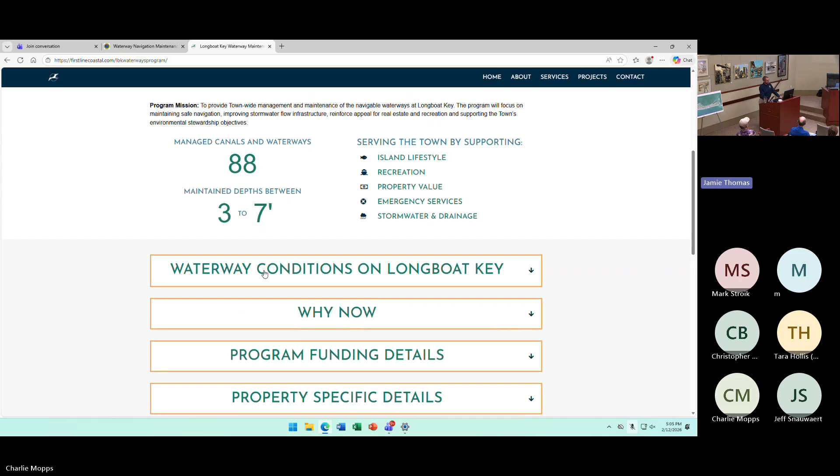And in it holds a lot of information. I'll scroll to the side because I made the mistake of not doing that last time. But if you go into this, you'll have a lot of drop-down menus with some really interesting information.

This one here, the waterway conditions on Longboat Key - essentially they went out and did a survey of every canal, drove it with a boat, a 21-foot boat, an Aquasport. They actually had a 360 camera on top that mimics exactly like if you took the little guy and put him on a Google map and you can go up and down a street. They literally did this with a boat, so you can see where the shoalings are and everything else.

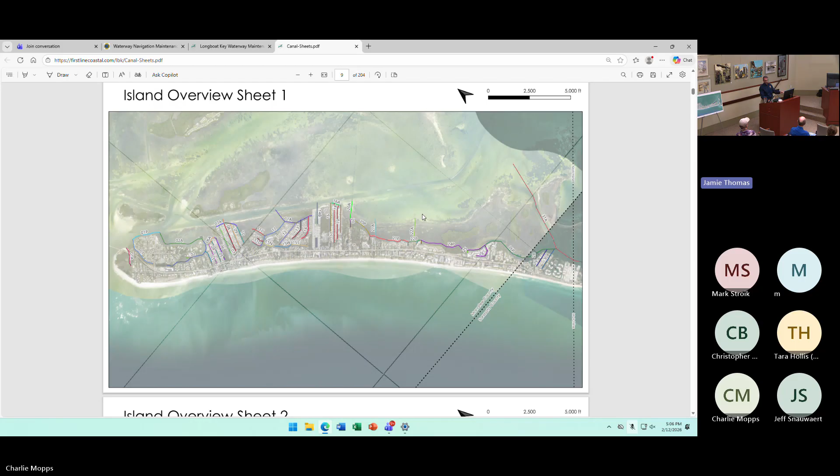But if you click on this part right here, it's going to come up with the canal sheets. I like to keep this sheet open because a lot of times the questions lead to, whoa, what about this, what about that? It's broken down between all of these, and all of your canals are numbered. So all you have to do is find the number of your canal, go to your canal sheet, and it will show your existing condition and what the end game is that we're trying to achieve on your behalf.

And it has a bunch of other information. They actually did a boat survey while they're in there. They looked at the average size of a vessel, the average width of a vessel, because he's been a captain for as long or longer than I have. He can look at a vessel, look up the manufacturer information, and find out the draft of that vessel. So all that information is in this, so you can see if the canal is meeting the needs and service levels of the people currently utilizing them.

The canal sheets, this is just one of them. This is Canal 1, obviously. It shows all the existing conditions, the design parameters. It's permitted as a 20-foot wide canal. And then it tells what permit might already be associated with it. So there's been a lot of effort and research that went behind this.

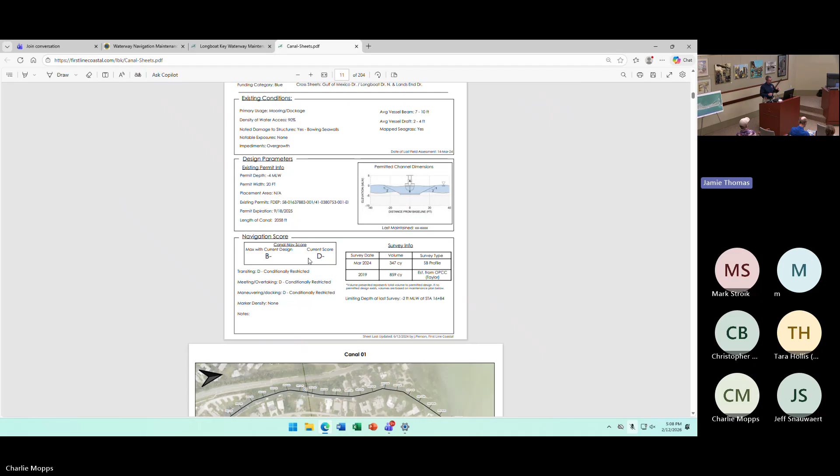The current condition is a D minus, so it's navigable, but almost barely. Once the program is up and operational, we're hoping to get it up to at least a B minus. These parameters are actually explained a little more in there, with a depiction and the goals of the program for that specific canal.

If we scroll down, why now? It has some of the messaging that we're going to talk through tonight. The program funding details tell us we're looking to collect up, in and around $9 million within that first 5 years. It's always been designed as a pay-as-you-go program, so we'd have to collect money in order to have enough in the pocket to go forward with a project.

After that first 5 years, we're looking to reduce that initial assessment in half, so in year 6, at least in half. That's when we start getting into the maintenance part of the program, because right now we're in restoration. The last time any of the canals in the town were dredged was in 2003, so 23 years ago was the last time there was any effort to make these canals navigable.

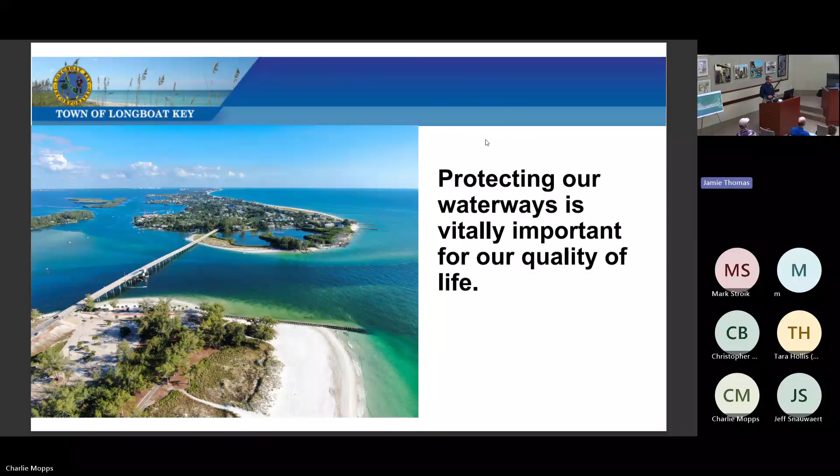As we move through, this program actually supports both, and it aligns with the vision and mission of the town, where the natural assets of a barrier island combine with cultural and recreational amenities. Well, canals are recreational amenities, to vigorously maintain and preserve Longboat Key's status as a premier residential and visitor spot.

Those things are one of the reasons why people buy property on Longboat Key — to go to the beach, to have a waterfront property where they can have a boat in their backyard. It's one of those things that are a driving force behind the potential development of this program.

Our property values and quality of life revolve around clean, navigable water. You have the unique opportunity to live in one of the only 14 or so national marine estuaries. Sarasota Bay is a national marine estuary. It was designated that a long time ago.

The health of that bay is doing really well right now. We actually work a lot with the Sarasota Bay Estuary Program and do grant funding opportunities with them. But this program, in some ways, as I'll demonstrate, will actually support what they're looking for. And waterways are a shared amenity that support each of us — I'll get into some of the sharing those waterways do, even if you're not on a waterway.

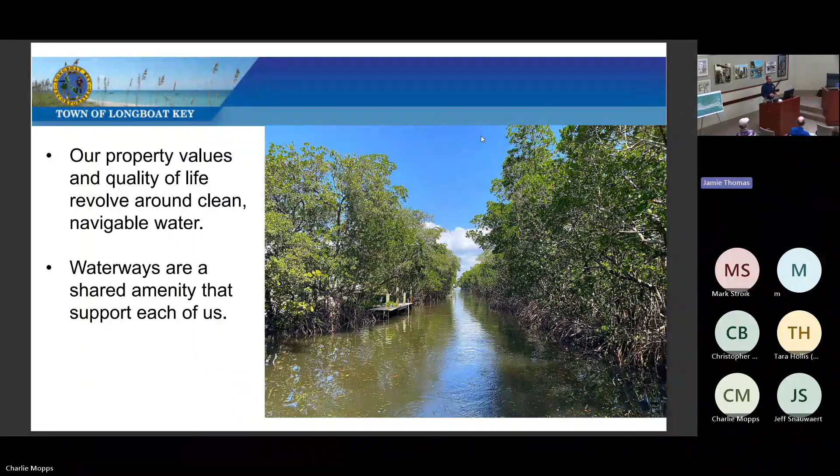The issue was first brought to the commission back in 1996. In 1996, they did a bunch of studies, hired other people and consultants at the time. They did legal reviews and everything else to try to establish a canal maintenance program, like a navigation maintenance program. Back then—

You fast forward to 2007, and then there was a recession. And at that recession, the thing fell off.

When I got hired — because for 15 years I was Charlotte County's coastal programs manager, and that included over 300 miles of navigable channel that I had to keep navigable. Most of those were residential canals like we have, or access channels just like we have, including beaches. So when they learned I had this kind of expertise, it kind of revigorated the whole concept — how did you do it down there, what's going on.

So I started doing a bunch of research, and through 12 to 15 presentations to the commission since I've been here, we've gotten to this point. We've hired great consultants that got us to the point where we're able to potentially push a program forward. And as you can see, over 30 reviews and public hearings were conducted on behalf of this potential program.

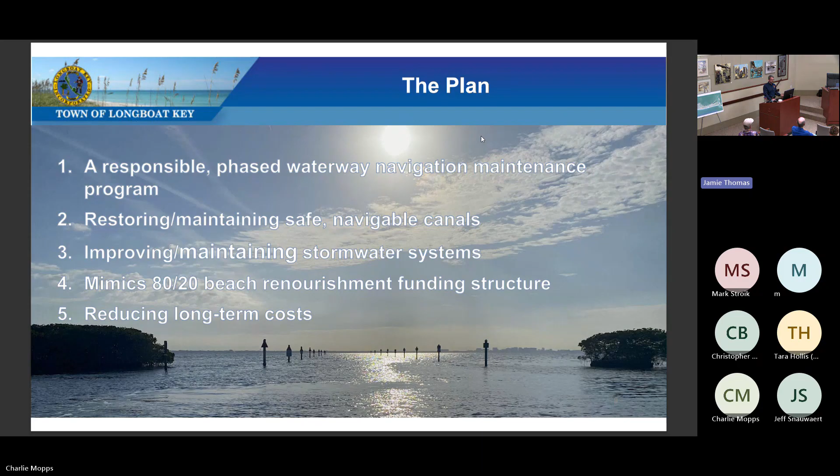By having a plan in place and a program in place, it's going to reduce long-term costs. So what are some of the benefits? For recreational boaters, it's maintaining the waterways so they can get in and out of those canals, and people can visit those nice fishing spots around Bayou Hammock and whatnot. It makes it so you can actually get to these locations.

It improves and maintains our water flow and stormwater. It reinforces appeal for real estate and tourism. If you live on a canal and you're going to sell your house, being able to say you live on a municipal maintained waterway might drive up the value of your property a little bit. There's also potential reuse of qualified dredge material.

In your canals, you have material that needs to come out, but we also have a 3 to 4 acre mitigation site, a seagrass mitigation site. I need about 24,000 cubic yards to fill in order to create that mitigation site, and that's tied to this program. It comes at a hefty cost, but if I can use some of the material from your canals to fill that, it's a win-win situation.

Environmental enhancements: some of our neighboring communities on the East Coast actually dredge for bioload reduction, where they have blue-green algae blooms. They dredge to get the detritus, the decaying material, off the bottom of the canal, which is a bioload. Bioloads like this contribute to red tide, feeding those nasty organisms. So if you dredge it, get rid of it, and put it in a deep pocket or get it gone, that material won't be there to feed those nasty things.

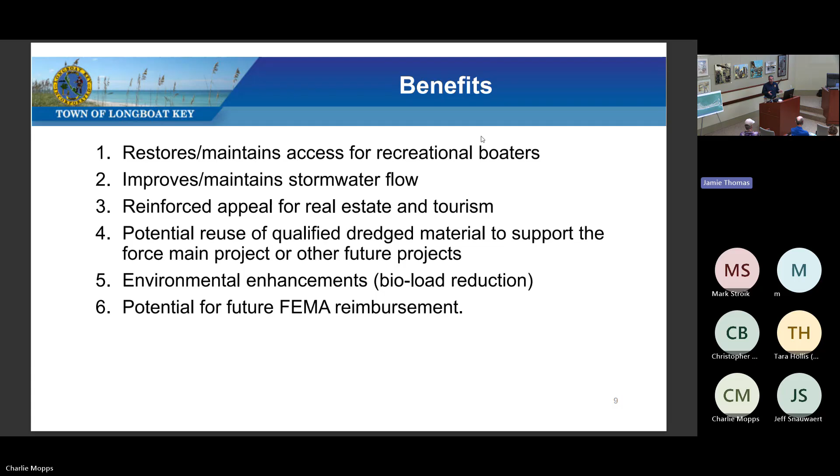I was able to go to FEMA and say, can you pay for this? And they said, here you go. So I was able to do it at no cost to the citizens there, because we were able to prove that they were in a maintained navigation waterway program.

How do we pay for it? Fair, simple, transparent - those are the things these folks have to look at, because it has to be defendable. They use those principles to make sure that for you all, we're doing things in a fair, simple, and transparent method. 80% of the cost would be paid by the direct access boaters.

So if you live on a canal and you have a boat, or have the potential to put a boat there, you would bear 80% of the cost. If you do not, you would pay 20% of that cost. We're estimating around $9 million is what we need to collect within the first 5 years, so about $2 million a year, to get us to the point where we need to be in order to get all of our canals restored.

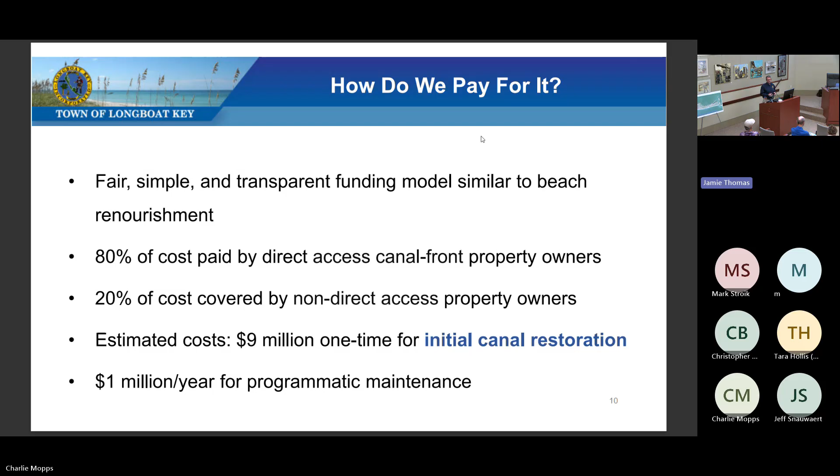Right now we're in the process of restoring canals, we're not maintaining them. You can't go through 23 years of neglect and think you're just maintaining. After that, we're looking at initially year 6, year 7, a $1 million cost. Then we'll be assessing what the shoaling rates are, where we need to hit, and can we actually drive those costs even further down. By doing so, we're looking to halve at least the initial assessments.

So the methodology was, 30% of the entire program would be paid for by ad valorem millage, so everybody pays into that. And the breakdown goes: if you're direct access, you pay 10% millage and 70% assessment, totaling 80%; if not, you pay 20% millage, which is the assessment portion of it.

So your total would be 80%. If you're non-direct access, then you would only be paying 20% of the total cost of the program.

What we did was break down the island a little bit here, and there's maps up here, and there's more maps we can show you. When we get to the online portion, when I'm walking you through how to look this stuff up, it's delineated just like this, just different colors.

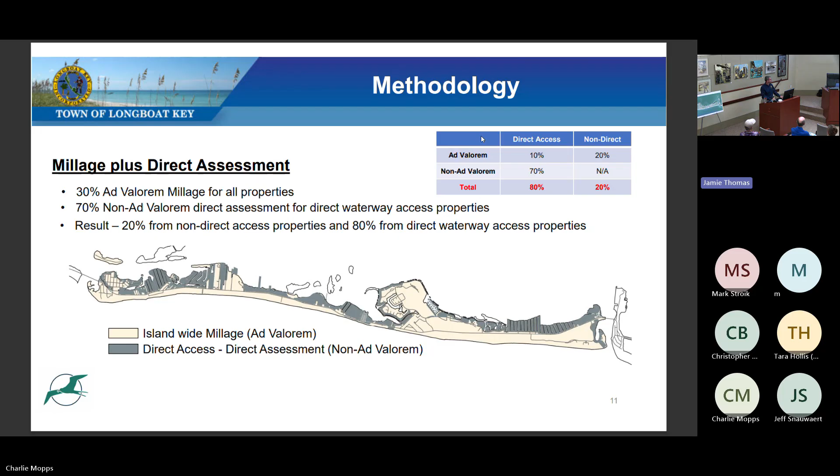So why does it work? It's fair, familiar, consistent with past practices. The past practice was 80-20 at the beach. If you lived west of Gulf of Mexico Drive, you paid the 80%. If you lived east of Gulf of Mexico Drive, you didn't.

You paid the 20. It saves money in the long run by avoiding these types of emergency actions. When you're out there just doing maintenance, it's kind of like patching a pothole versus repaving an entire road. It's the escalation that we're trying to avoid in the future, and it enhances the overall community value and island resiliency. The more we can keep nice water for our drain pipes to receive, the better resiliency we're providing.

And then maintenance minimizes long-term action. One of the examples I like to give is we did this project on the Myakka River side. It was a pretty big community, but we were there for over a year because they let their canals get to such a point of disrepair that it took us a year to get them back to steady state operations.

That means a contractor was there all the time, up and down the roads, with equipment just outside the house. The next time they came back, because now they were part of a maintenance program, all we had to do was hit the access channels and the dead end parts of the canal. I had a contract out there for a couple of months, so there's less impact to the community when you have a program.

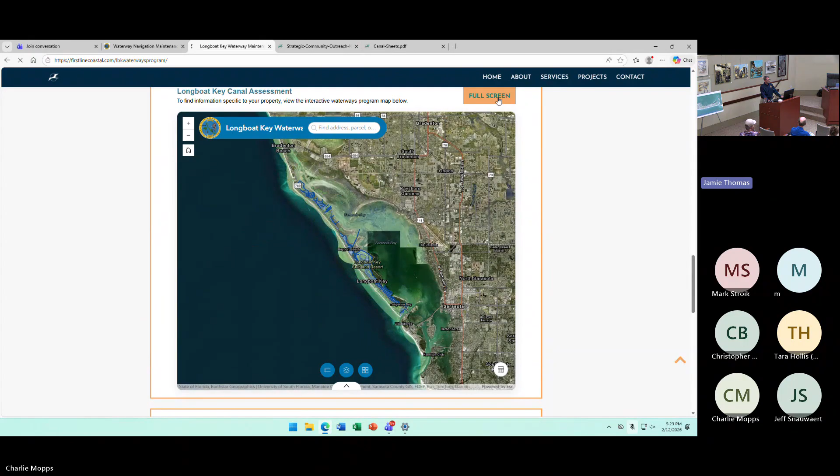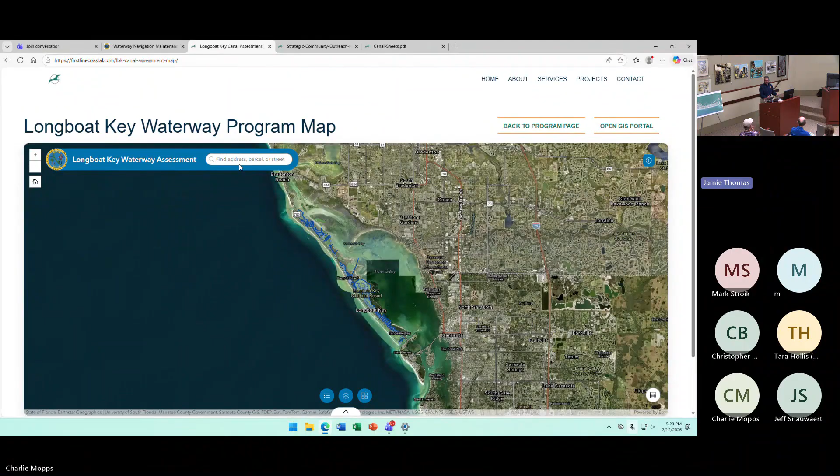Now remember, there's two ways of getting there. You can get right to this same thing from the town's website, or you can go to this website, look through some material, and get into the same thing. If you have a property address, you can just put it in here and go right to what you need.

Or if you're like, oh, I just want to, I'm curious, I want to see what my neighbor's paying, I'm just going to pick a random house. I don't know who lives there, I'm just pulling it up. This person has a taxable value of over $2 million.

They have one EBU. If you have a dock or if you have two docks, it's all one. Or if you don't have a dock, but you have the ability to put in a dock, it's still one.

When you look at this, the mill rate's very low, it's 0.0623. So their ad valorem assessment on a $2.6 million property is $162. If their assessment, that's the millage tax, is $162, and their assessment, that's a fixed fee no matter who we're talking about, is $620, so their yearly assessment is $782 to be in the program.

And we broke it down. We actually looked at every condo, we looked at every property, even ones that have a shared dock structure. You've got Longboat Harbor up in here.

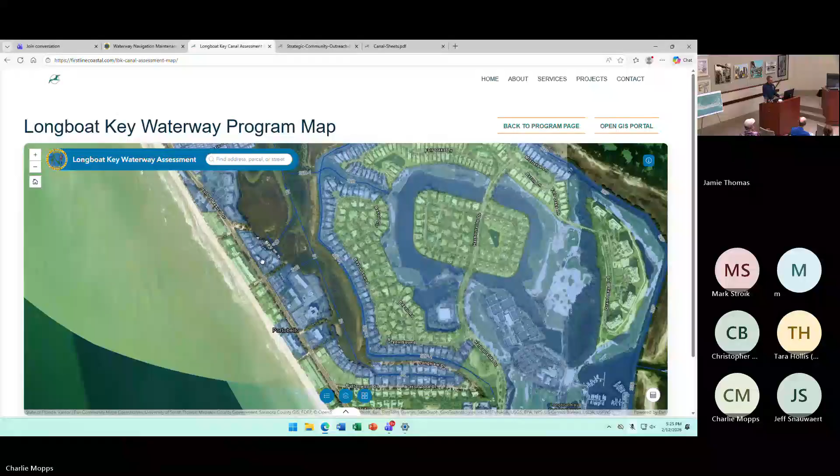Actually, it's a little bit further, sorry about that. Yeah, that's Spanish Main. Yep, they do too, yeah, it's a good one. So we can go to Twin Shores.

So if you click on this, you'll see that even in the shared use areas where you have a common element with a docking structure, they actually break it down. This isn't coming up right... is that the common area, or do I have to get into one of these? I think if you're in a common area, it shows 0. Yeah, there you go, because here it is.

It's a common area because common areas are not taxable, right? But you have to tie it to a property. So the way it's broken down is they have an ad valorem assessment of 1.25, and then the EBU rate of 620. Assessed value is $20,000. So their combined total annual is $125.25.

That's for the first 5 years. At year 6, it drops down to $64. And then we're hoping to reduce even that cost further because as we go through and we're able to find out where shoaling rates are and whatnot, we can actually see what's the frequency of action that we need to take. But you have to remember, even in the off years, we're going out monitoring.

We're doing those surveys. So we can go to FEMA. We can see what those shoaling rates are. We can actually develop that level of knowledge that we can actually incorporate into the program and then hopefully even reduce these costs further.

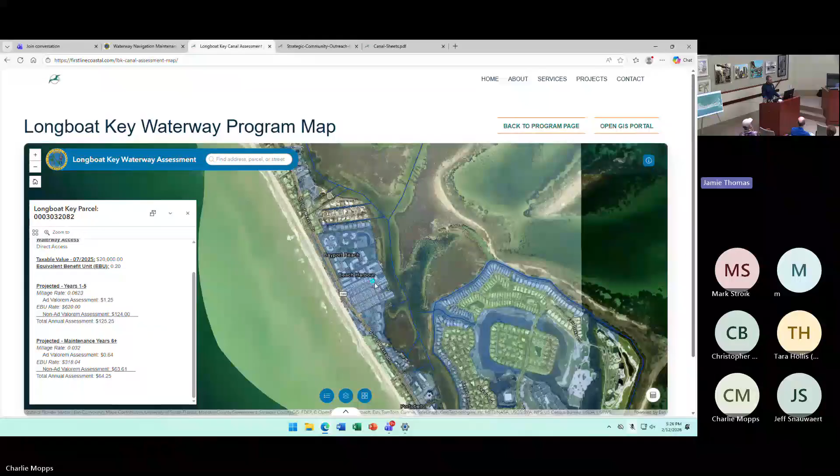But this is like a really easy, user-friendly way of being able to go into any one of these. If you own a slip out here, the property value is only $100,000. Ad valorem rate is only $6.53 plus the assessment, that fixed fee assessment. So you're looking at 626. You can do that for any property on the entire island.

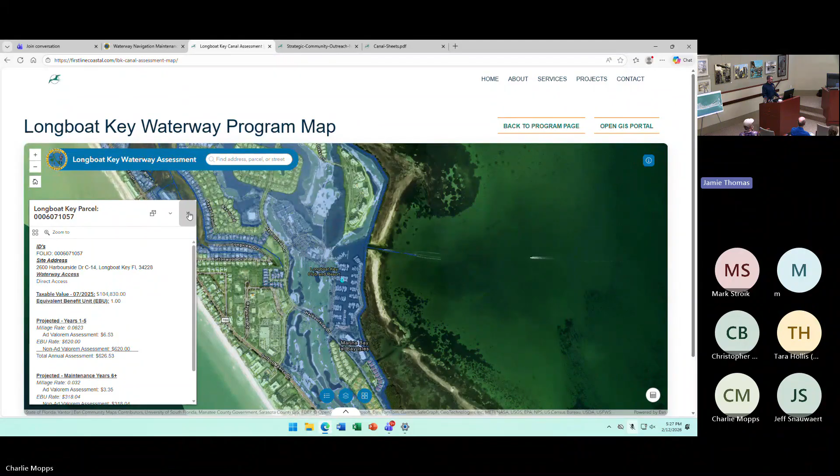So with that, a couple of other things we're looking to do, and I want to bring this up, and then I'm gonna leave the floor to everybody. That way we can start fielding some questions. We've asked for money to kind of make this program happen sooner, because one of the questions we always ask is, when can you start dredging?

Well, if it's a pay-as-you-go program, we're looking at about year 3 before we can start actually getting a dredge out there. However, we did reach out because the Water Resource Development Act of 2026 had opened up for mitigation, bayside type mitigation, dredging, relating to dredge activity, that type of stuff. So we actually put in an appropriations request through Congressman Buchanan, or whoever wants to jump on the bandwagon and support this, for $3 million, because that's about the figure it's going to cost to build the 3-acre mitigation site right here.

And what we used for that as justification was, this is the old Intracoastal Waterway. It's called the Long Bar Channel. It was dredged by the Army Corps of Engineers back in the 1890s. Then in 1916, they realigned the channel to where it currently exists.

So if I can get an appropriations to create this, we're going to take the material out of the canals to backfill, because I need around 24,000 cubic yards of material in order to fill this deep pocket, in order to get it up above the photic zone, so that way seagrasses will grow.

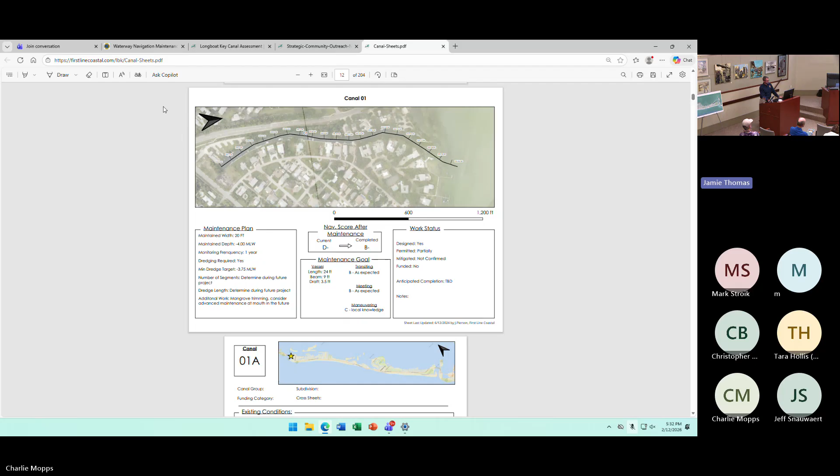Essentially, we came up with a design vessel for each waterway, and whether or not the design vessel could be accommodated in that waterway would give us a green light or yellow light for whether or not dredging needed to occur.

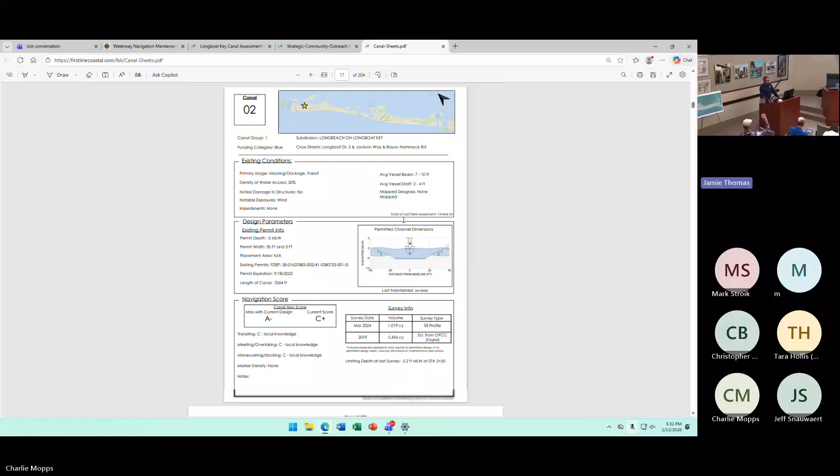Just following up - is that documented? I can't read that. So if we have a neighbor with a sailboat that can't get out because the sandbars have gotten so big, is that documented on here - what you determined was an appropriate vessel, so our neighborhood people could look and say, do I have a boat in here that they deemed inappropriate? It sure is - used to be appropriate.

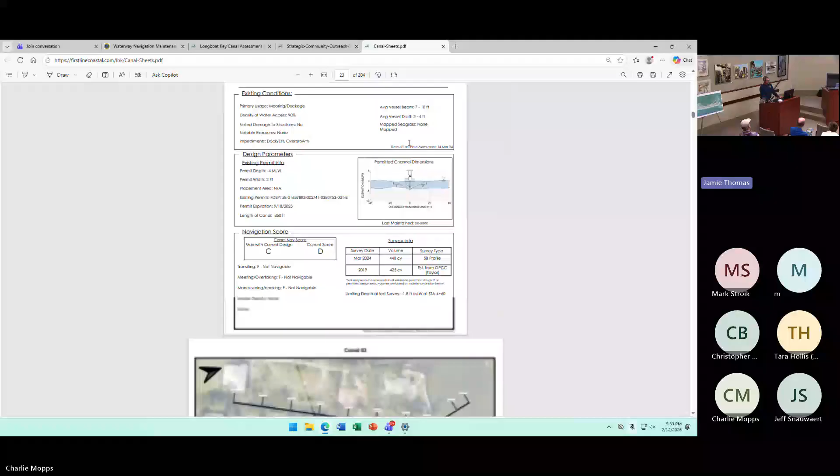I mean, appropriate is in the eye of the beholder, right? There's certainly lots of times where you can get a larger vessel down a canal that's a little more restricted, at high tide for example. It doesn't mean you can't do it - it just means maybe that canal wasn't necessarily designed for it. But to answer your question directly, yes ma'am, it is documented.

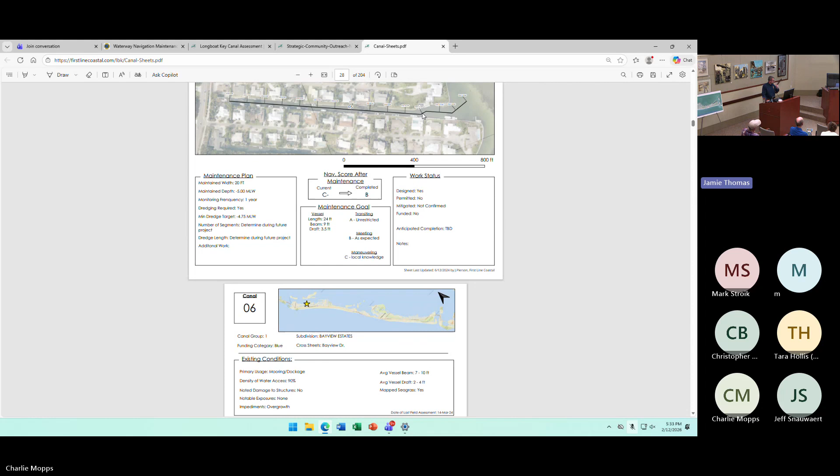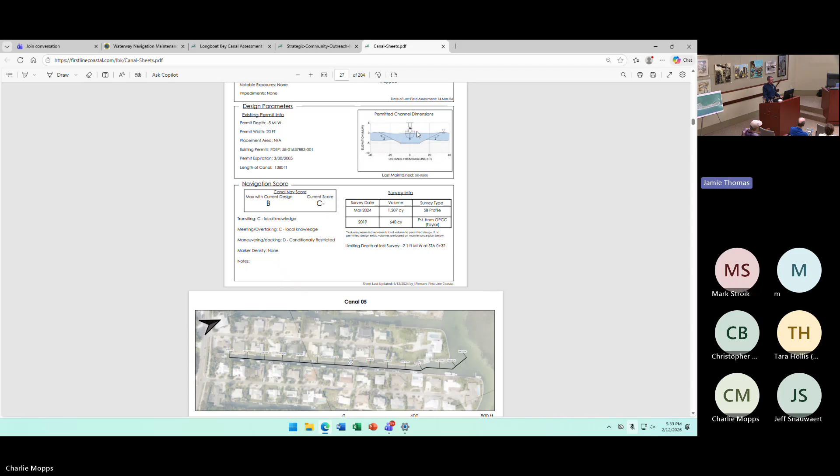You will notice in each of these there is a design vessel that is shown. Just above that, you will see there's an average vessel beam and an average vessel draft in the little table. In this particular case, it says 7 to 10 foot beam and a 2 to 4 foot draft.

The little sketch below is that class vessel nestled in the proposed design template. In this particular case, the proposed dredging is to a -5 foot depth at mean low water, compared to the average low tide -5 foot, and it's a 20 foot width on what he has on screen here.

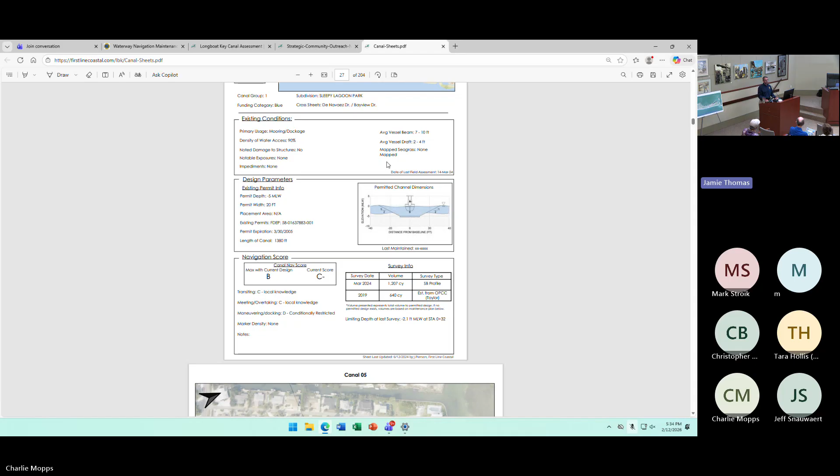A lot of that information was pulled from previous permits, because in 2003 the town did pretty extensive research and permitting. So what we did was look at what was permitted in the past, because we want to at least mimic that. Otherwise you're having to extend permits and spend a lot of money and effort to do anything outside of that.

There's also a table in the bottom right that shows what we call survey info, giving an estimate on the total volume present in that canal to restore it to the proposed template. In this case, there's about 1,200 cubic yards of sediment that was surveyed, estimated from that March 2024 survey date, all to be removed to restore that idealized template.

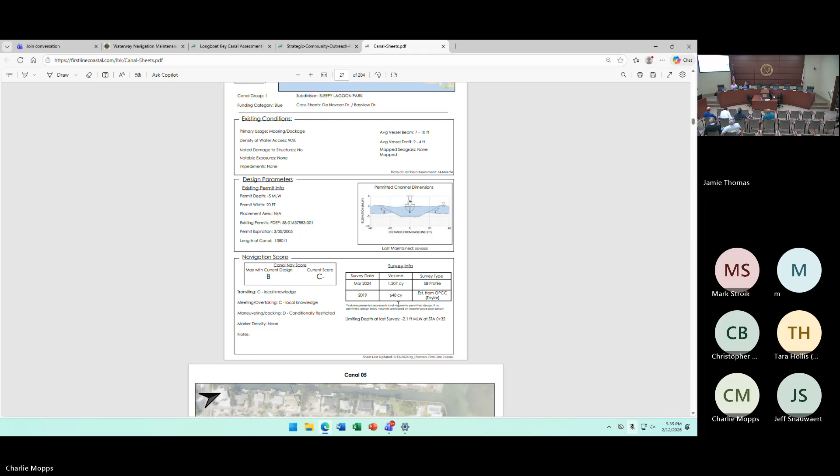No, that's a great point. So this is the navigation maintenance program. He asked if it includes the seawalls as well. Up to the seawalls, okay.

What we did was look at condition surveys, which aren't for permits or construction. There are a couple passes up and down to get what the edges look like and maybe the middle, then you interpolate what's in between, because it costs a lot of money to get beyond that.

But as long as you get to a point where you can make a determination, you can drive forward a program. Once you get the program going, you can drive forward the construction-level surveys, which are cross-sectional every 100 feet or some stationing mark, or the Army Corps now allows enough center lines or multi-beam to capture as much information within your dredge template as you can.

Yes sir, so just to be clear, let's say you have lifts or docks on both sides, you're just going to do the center, nothing under the lifts. Is that correct? Correct, but you're bringing up a great point because this comes up in every conversation.

What the town's trying to do is repave the road. Underneath your lift, that's your dock and that's your driveway, and your garage, that's your lift. Getting to your garage, you use your driveway. So we're going to establish the center line of those canals again, in the widths that were permittable in the past.

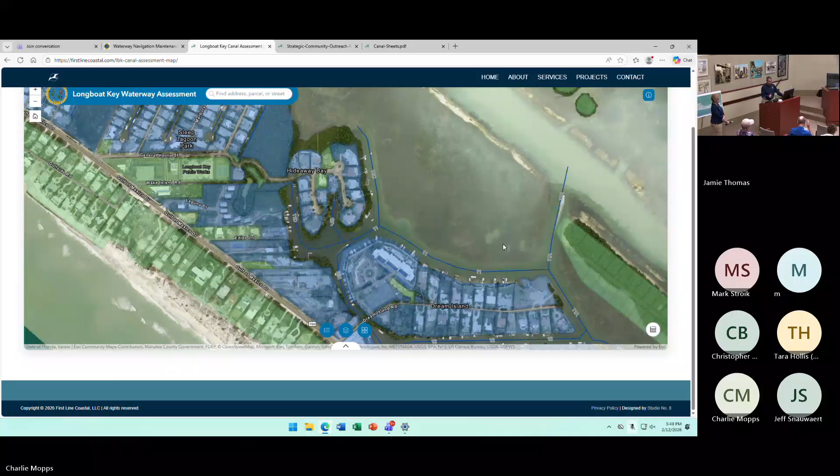So down here, down by Dry Dock, you said? Yeah, he's on Halyard, which is the southern end. If you go just a little bit north, Charlie, the north end... no, come back down to Country Club Shores, where Country Club Shores goes from the long canals to the short canals. Yep, that's at the bottom of your... the last waterway on the south. Oh, right there, so that's it. Yeah, so half of the right side of Halyard, but is open water.

Yeah, but this dredge canal needs to be maintained. You will often hear us refer to this - sometimes you'll see the title at the top, Longboat Key Waterway Assessment. Sometimes we use the word canal a little bit interchangeably with waterway, but maybe more properly waterway is the term we should be using. As far as the extent of the waterways, our objective is normally to extend them far enough to get you to open water, to where you can open it up and you're not draft restricted anymore.

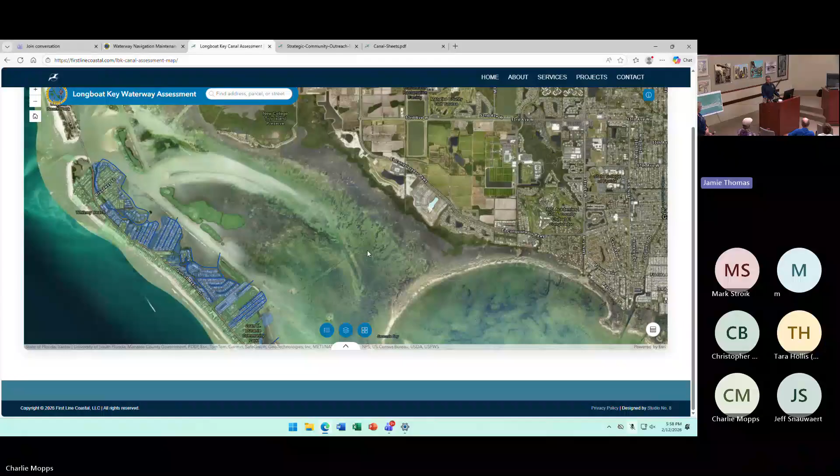The question was, did the subaqueous pipe get installed? Because you're going to need some fill for that too, right? Well, we will. One of the things we were initially looking at is the potential of using more of our dredge material from the canals, using the project to pay for the placement of that material out here as well. But no, it hasn't been installed.

It's currently in permitting. We literally just had a meeting today about it. We got an RFI, a request for additional information, from the state. Our team has answered it, and we're just waiting to get a response from the Army Corps. We're still moving forward with that project, hopefully for a summer start of construction.

We're waiting for the design consultant to tell us, and also the contractor, Garney, who's a really good firm, they do this all the time. They might want to just import fill because of the liability of having two contractors working around the subaqueous pipe, since if somebody damages it, who's responsible? So it's something we're still looking into.

Ma'am, you had another question. I came late, so if you already did this, just stop me. No, it's okay. On the methodology for the assessment, I'm bringing baggage from undergrounding.

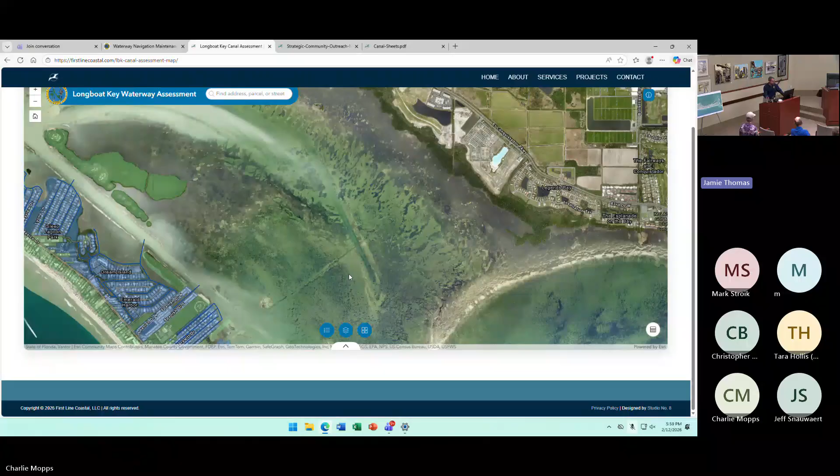So we've got two components, an ad valorem and a non-ad valorem. Correct. And the ad valorem is a certain percent of your property value? Correct, based on a millage rate, and the millage rate is 0.0623. And the non-ad valorem, that's the benefit units? That's the benefit unit, a fixed fee of $620.

And like with the undergrounding, they determined your benefit units based on your acreage, lot size. Are we doing the same thing here?

No, we're basing it off each residential unit having one benefit unit because they have a boat, or the ability to have a boat. It's different than acreage, it's different than linear footage, which is how some other municipalities do it.

And for condos with marinas, how did you determine the number of benefit units? Say you have a 100-unit condo and there are 10 docks, then each condo pays 1/10 of an equivalent benefit unit. So 1/10 of the $620, they'd pay $62. Okay, thank you.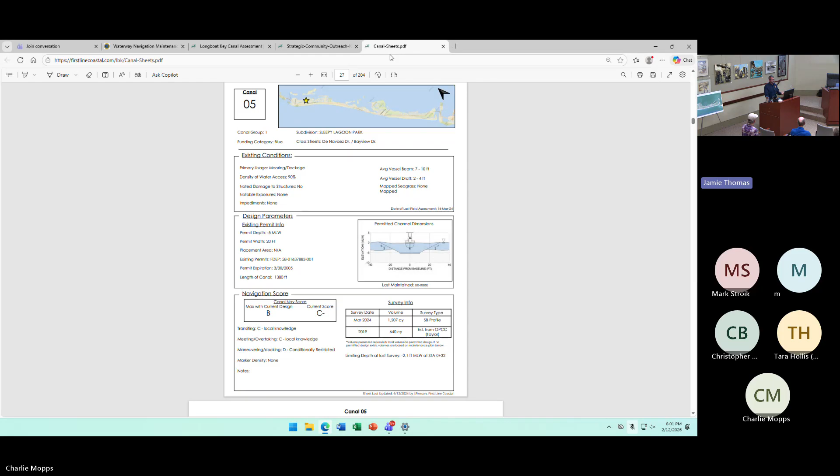What needs to be done, and how do you identify where your priorities are? Is it obvious to see where the canal has failed? That would be more when you go in and find your property, like if you're on this map, which is really great.

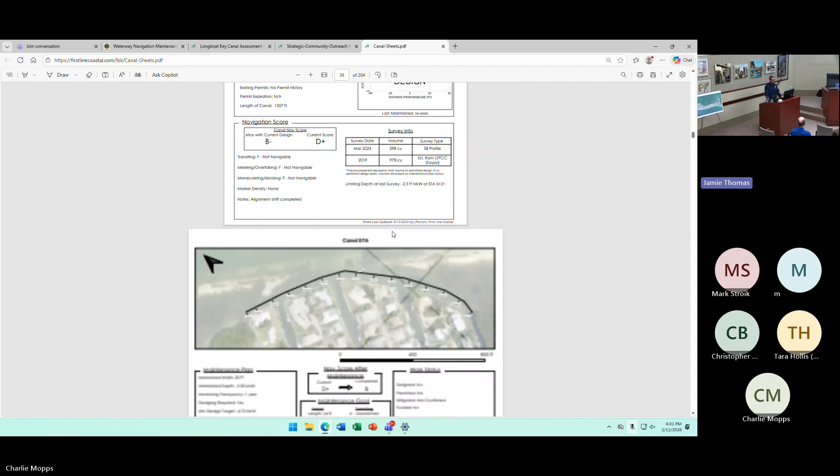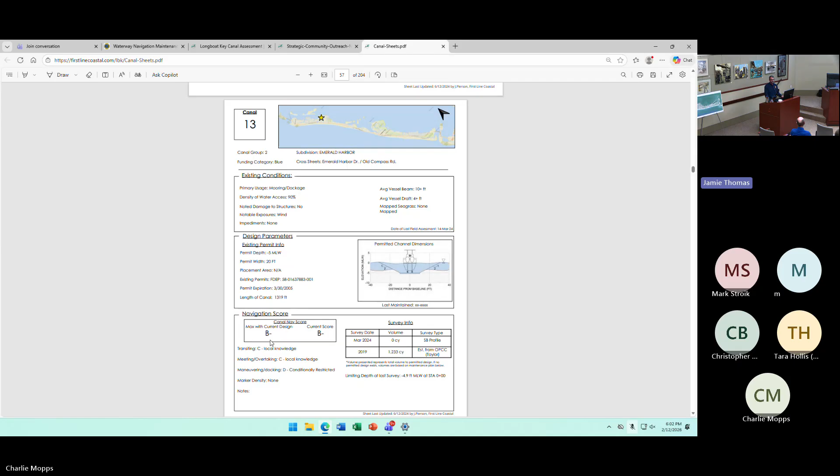If you know you live here and I live on Canal 13, you could just go to this same website, to the canal sheets, and scroll down to Canal 13. So here's Canal 13, it shows all of that same assessment, and that currently is in a B, so it's in good standing.

Is there talk about the depth of it at average low tide? Depending on the type of boat that traffics the canal, is there a minimum depth at average low tide that a canal should have?

Well, it all goes back to the boat. I can't necessarily answer that, it's specific to the location, because of the canal survey First Line did and the boat surveys and everything else. It depends, because you might have a small boat, your neighbor might have one that draws 2 feet, you might have one that draws 10 inches. So they design the canal in accordance with its current use or design use.

I could be mistaken, I'm taking a quick peruse through the canal sheets, but I think that the shallowest canal design we have is minus 4 feet MLW. I think, that's the minimum.